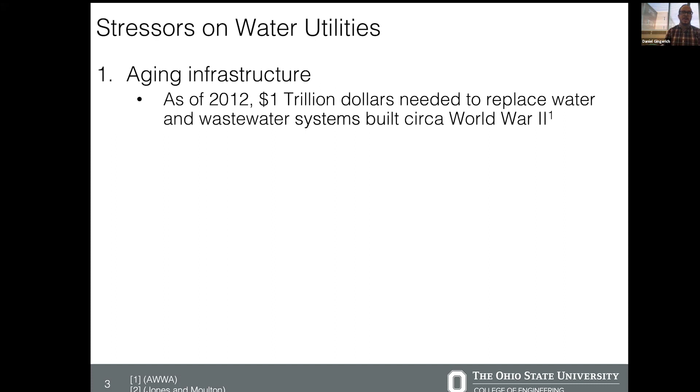In addition, water systems aren't just going to need to deal with the past and rebuild as we update and modernize our infrastructure, but also think about a far more uncertain future when it comes to the consequences of climate change. Estimates say that dealing with drought resiliency and impacts from things like flooding is going to cost water systems on the order of $36 billion by 2050, in order to meet the challenges that a changing climate is likely to impose on them.

Then there are questions around regulations and increasing activity around drinking water contamination. As of right now, there are over 90 contaminants that have primary national drinking water regulations, or primary maximum contaminant levels. There are also secondary MCLs, which I'll talk about a little later. But these are regulations that water utilities have to meet when it comes to the provision of drinking water services and drinking water systems.

This will have affordability consequences because water utilities will often need to charge their customer bases in order to pay back the capital that goes into developing the treatment systems required to meet these regulations, or to pay for the operating and maintenance costs for such treatment processes.

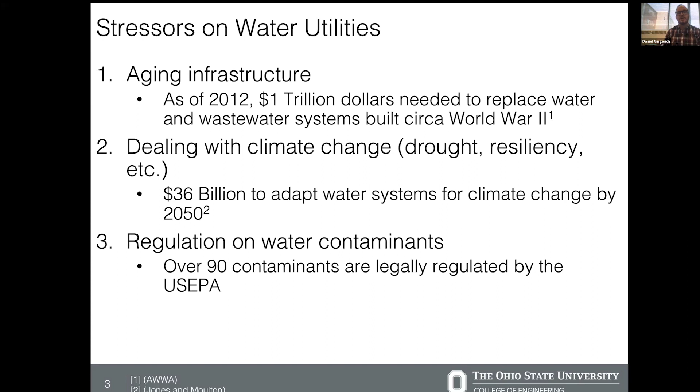Thinking about regulations and water affordability, while it dates back to the initial congressional record and debate around the 1974 Safe Drinking Water Act, it really becomes a regulatory push that utilities and the Environmental Protection Agency start to think about in 1996, with the Safe Drinking Water Act amendments signed by President Bill Clinton. This is really the start of when the EPA was formally tasked with thinking about affordability and its consequences for customers and the American population, and the consequences that regulations might have on the ability of households to afford water services.

We can think about this relationship between water affordability and regulations like this. We have several groups in this simple model. We have utilities whose job is to treat and distribute water to customers, and we have households that have money to pay for that water provision service. In essence, households give money to utilities and utilities give households water back.

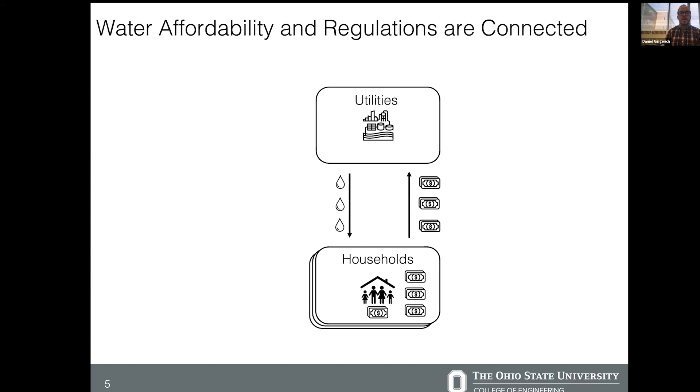But this might change, and in particular we can think about how utilities have to spend the money they make. Oftentimes, the money that utilities bring in as revenue needs to go to pay for maintenance, operating costs, and system-level improvements in order to continue providing safe, reliable water sources to their consumers.

This then gets shifted when the Environmental Protection Agency or another regulatory body comes along and promulgates a regulation. In particular, we can think about an EPA regulation that is going to increase the cost or create more need for improvements to the system, either in the form of capital costs or operating and maintenance changes. Now, the EPA is aware of this, and they're tasked by the 1996 Safe Drinking Water Act amendments to think about the ability of systems to raise money from their ratepayers.

In essence, the amount of money left over that households can afford to spend on drinking water provision is what's known as the system's financial capacity. In this model and understanding, the system capacity can then be tapped in order to pay for water improvements and to cover the increased costs that a regulation might impose on systems.

This works up to a certain point. So for instance, we have one hypothetical regulation here, but we can think about a second hypothetical regulation that is also going to impose additional costs on water utilities, and those costs are going to need to be passed along to ratepayers.

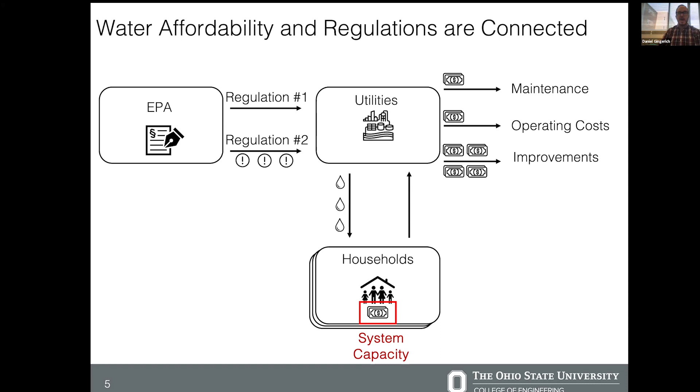However, here we run into a scenario where we can compare the remaining system capacity in the water utility and the households that pay rates to cover these costs. We can see that at a certain point there will be a fundamental mismatch, where the needs of the utility to comply with the regulation don't match up with the financial capacity of its ratepayers to afford and still maintain access to drinking water services. This is what we think about and how we define the idea of unaffordable water.

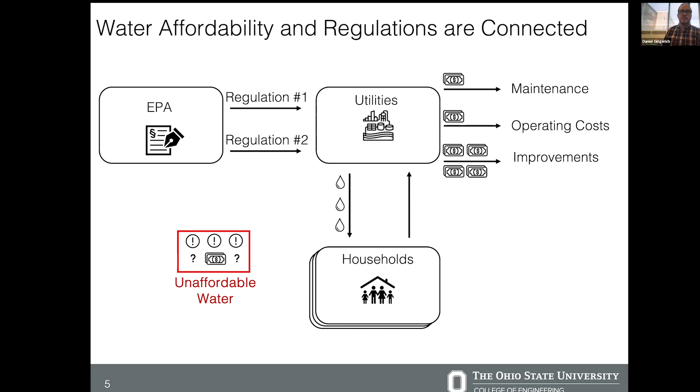To assess this work and think about this history of water affordability, I'm going to use the same general framework, or the same general model. I'll provide a high-level introduction, and I'm happy to take questions during the Q&A period. We'll also do a little work to talk about how we tailor this in each case. But in general, we want to understand what is the financial capacity of systems, and how much can they tap into without overburdening their consumers for water.

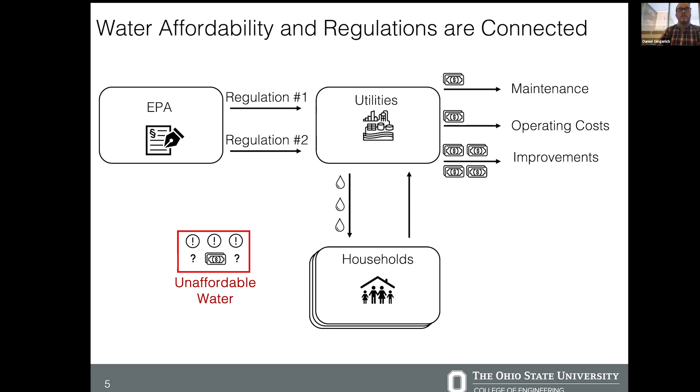To do this, we're going to collect data on four different sources. We're going to look at the demographics of systems, that is, what is the average household size, because that will impact the average water bill per household. We're looking at data on water usage per household, and we're going to look at a variety of economic factors and metrics to understand the financial health and well-being of households that are ratepayers.

In addition to that demographic data shown in the green box, we're also going to look at cost of water in the blue box. That will come from a variety of sources to understand current water rates and the household water bills consumers are paying for water services. We're going to look at the cost to comply with regulations, using data and models developed by the EPA specifically for the purpose of understanding the economic consequences of regulation.

We're going to look at a diversity of affordability thresholds or affordability metrics, in part because over the past 2.5 decades, as we've tried to nail down this nebulous concept of affordable water, there's been a bunch of different suggestions, both from the EPA as the people whose job it will be to implement such a metric, as well as the broader academic and water policy community. In this talk, I'm going to highlight 5 different affordability metrics.

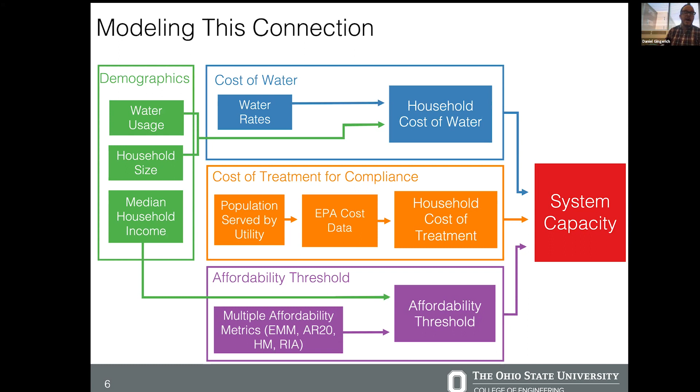The first of these is the expenditure margin method. The basic concept is that we take the household water bill after a regulation has been proposed and compare that to the community's median household income, or MHI. If that ratio is above some critical threshold, then we determine that water is unaffordable. For much of the history of the EPA's work on water affordability, this has been their standard approach.

There have been attempts to look at other methods, such as the incremental burden method. Whereas the expenditure margin method thought about the entirety of a water bill that a consumer is paying, the incremental burden focuses on the consequences of one single regulation. We'll look at this in the context of the arsenic regulation promulgated in 2001, trying to understand the incremental cost of just complying with an arsenic standard. But we're still doing the same basic principle: we look at this cost and compare it to the community's median household income, and if it's above some threshold, that's unaffordable water.

There are other metrics that have come out in recent years. Some include the hours of minimum wage—the number of hours a household or worker would need to work at a minimum wage job to afford water provision for a month. There's the affordability ratio, the ratio of the household's water bill to disposable income, where disposable income is household income minus essential costs like rent, food, electricity, other forms of energy, transportation, and healthcare costs. Once removed, this gives us a disposable income, and we can understand how much of that needs to be spent on water.

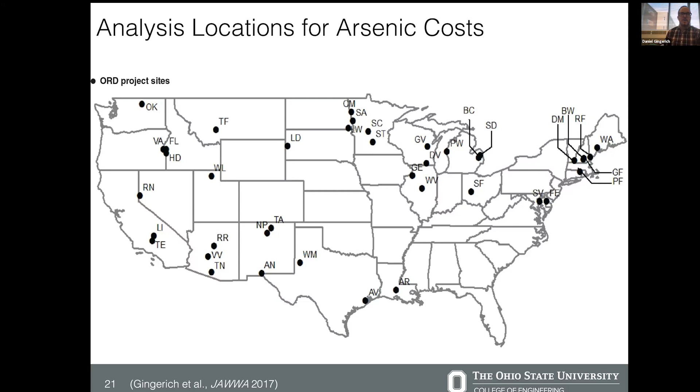What we found is that under different approaches, some locations would experience unaffordable treatment. This map here is showing those systems that would have been determined to be unaffordable, given what the economic conditions were on the ground. We can see that there's a diversity of these.

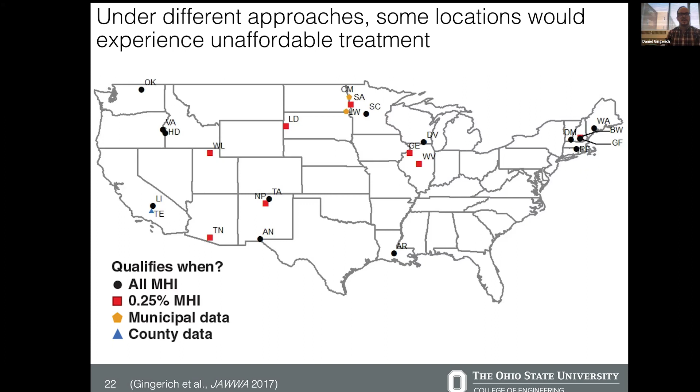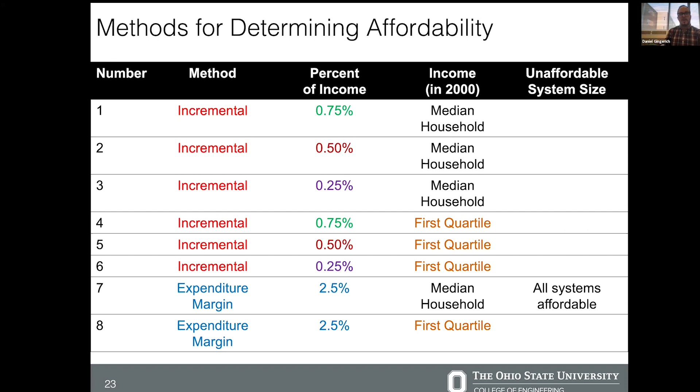We can also look not just at the site level, but think about system level data across the entire country. If we go back to this particular table showing our methods for determining affordability, I've got this new column on the right about unaffordable system size. These are systems below a certain threshold that would be determined to have unaffordable water. For the standard the EPA used, method number 7, the expenditure margin with 2.5% of the median household income, it would turn out, as the EPA found, that all systems would be affordable. But we can change that by looking at some of these other methods.

For instance, if we looked not just at the median household income, but the first quartile household income using the expenditure margin, or with the 0.75% of the median household in the incremental standard, we see that the smallest systems, those serving less than 100 people, are likely to have had water that was unaffordable under the standard.

We can then change these thresholds a bit more. For instance, looking at those lower thresholds with the median household income, or some of the first quartile income with incremental burden, we see that all very small systems, all systems serving less than 500 people, would likely have been determined to be unaffordable under the arsenic maximum contaminant level that the EPA set.

And then finally, at the most strict affordability definition, the incremental standard at 0.25% of the first quartile household income in a community, we'd see that any small system, so any system serving less than 3,300 people, would be unaffordable. So there are some lessons and implications that come out of this for how we think about policy and water affordability, especially with this idea of an incremental method and not just the expenditure margin method that the EPA had adopted.

In essence, the key takeaway is that under an incremental burden approach, which was the method the EPA was considering as a result of the arsenic MCL process, it would have been more likely that standard would have triggered a determination of unaffordability. But there are some fundamental challenges with an incremental method that we haven't really acknowledged or addressed. The first is that an incremental burden approach fails to account for what might be considered a stacking up problem.

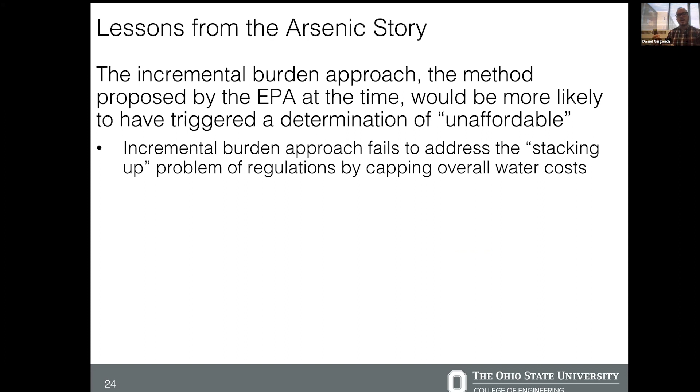That is, if regulation 1 imposes a cost of 0.5%, regulation 2 is another 0.5%, then 3, 4, 5, all at 0.5% each, I'm suddenly at 2.5% of my median household income for a total cost or total percent of income. If that's allowed to continue, it will eventually cause problems no matter what threshold you set as a total water burden, because there's no overall cap under an incremental burden approach.

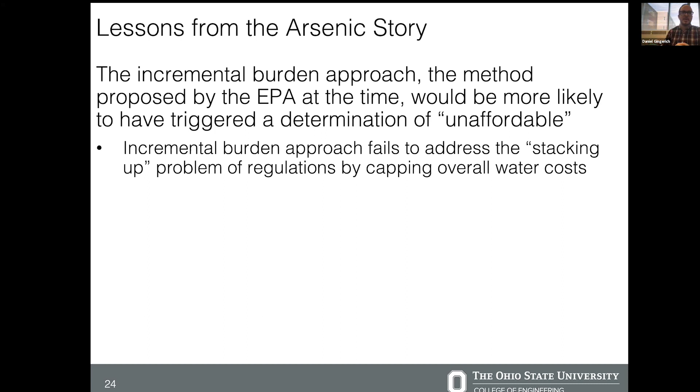It's also the case that any use of the median household income fails to focus on the needs of low-income households, which is critical for understanding household affordability. So really what we need to think about is not just median household incomes and system capacity, but more broadly about our entire community of ratepayers, not just those at the median household.

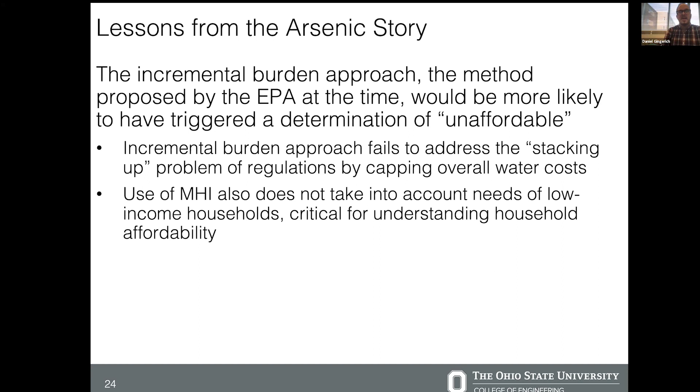Which brings me from this first story, the story from the early 2000s and the following decade and a half of work on arsenic, to think about what's really taken over the discussion in water affordability since then, which is understanding low-income households and their ability to afford water services.

This came to a head during the COVID-19 pandemic, in part because water utilities across the nation imposed moratoria on water shutoffs. That is, we don't care if you can't pay your water bills right now, we're going to keep giving you access to drinking water, in part because we recognize that drinking water is an important part of what it means to be healthy, and it is important in maintaining your health and safety during a pandemic, where one piece of guidance is doing things like washing your hands.

While that sounds trivial, there's scientific evidence that found there's likely to be a correlation between states and municipalities that had moratoria on water shutoffs during the pandemic and saving lives. In particular, there are estimates that upwards of about 9,000 lives were saved in the initial outbreak of COVID-19, which could be explained by the presence of moratoria on water shutoffs in those locations. So we see that there is, in fact, this connection.

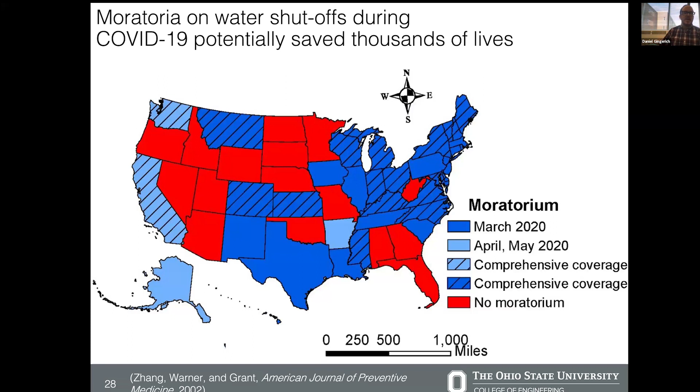But as the COVID-19 crisis, as the initial peak passed, we see communities that then moved to resume water shutoffs and water disconnections. In particular, we have one in Columbus. The moratoria ended on August 23rd of 2021, roughly a year and a half after it was implemented. Households were expected to pay for water services again, and if they did not, there would be disconnections, consequences, and loss of ability for water use.

So one of the questions we've been thinking about is, well, what is the current state of water affordability? To answer this question, we partnered with the Ohio Environmental Protection Agency to conduct a survey on water, sewer, and storm sewer rates throughout the entire state of Ohio. We're going to talk about our work thinking about water, but that report is available on the Ohio EPA's website, or I can send it to you if you're curious, to understand what water rates are throughout the state.

With water rates, before any regulations, we can now think about these various affordability metrics that I laid out, beginning around how we define and think about water affordability. Again, that can be just the percent of household income spent on water bills. We can think about the amount left over after essential purchases, and the number of hours of minimum wage work you might have to work in order to afford your monthly water bill.

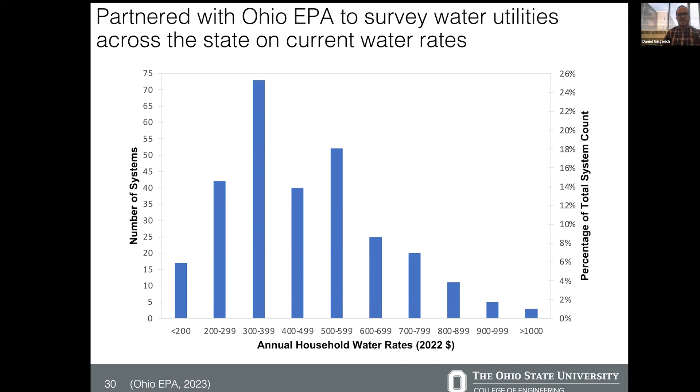That's not the case, though, if we think about some of these other metrics that are more geared towards low-income households and low-income populations, like our affordability ratio and the water cost, or the hours of minimum wage that need to be worked in order to afford water.

In these cases, we see that about 40 to 50% of communities or water systems in our survey have water bills that might not be affordable for their low-income consumers. So when we look at these low-income numbers, we see a story around how even if systems might be able to afford water provision and the median household might be able to pay their water bill, that's not the case for low-income households.

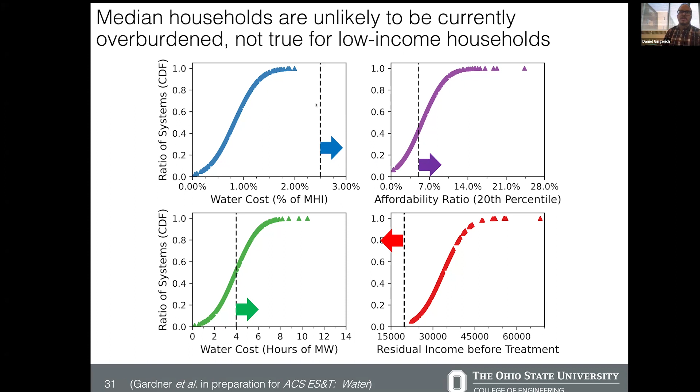However, if we break these data down by system size rather than presenting them all grouped together, we see that for many of these metrics, there are still consistent percentages of households affected, from very small up to large systems. For some metrics focused on disposable income for low-income households, even very large systems have significant populations unable to afford water services. This is consistent across system sizes, so system size might not necessarily be the protection we need to keep water bills affordable for all ratepayers.

But that's where affordability stands now: low-income households are likely to be stressed and experience water unaffordability, even as median households from most systems are likely to be fine.

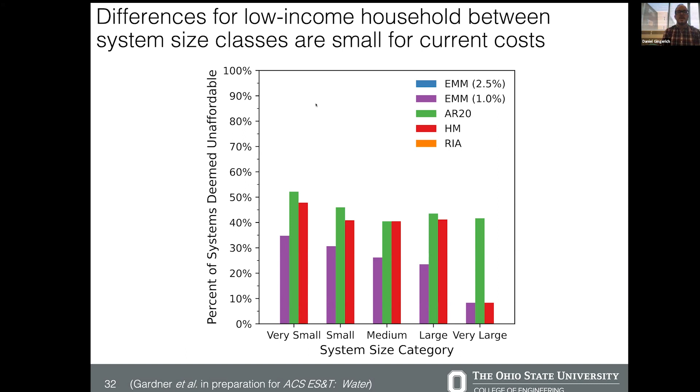Over the past few years, we've seen a flurry of scientific and regulatory activity to understand PFAS compounds. Under the regulations, there are several requirements that need to be met for the EPA to promulgate a regulation on drinking water. First, the contaminant needs to be widespread throughout the nation.

If it's not found in multiple states or regions, the EPA is likely to, instead of taking action itself, recommend that state-level departments of environmental protection, environmental quality, or health take action on their own, rather than getting the federal government involved in what is a regional problem.

If it is widespread, there has to be human health consequences as a result of that contaminant being present in order to justify regulation and justify the costs. These ones that have human health consequences are known as primary standards.

There are also, in the drinking water community, secondary standards. Those focus primarily on contaminants that have aesthetic consequences for water, like discoloration or taste and odor compounds. They can have cosmetic impacts for people who drink them. For instance, there's a standard on silver that has never been a threshold of concern in the United States, but it exists because there's evidence that high levels of silver in water might lead to skin discoloration for humans who consume it. It's purely a cosmetic change with no deleterious health consequences besides that.

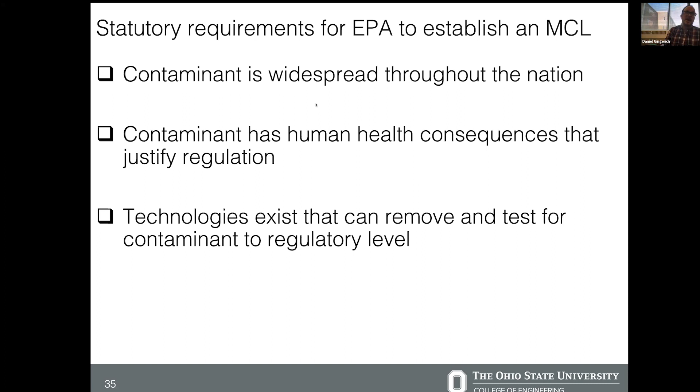Once a human health consequence has been demonstrated, there also needs to be evidence that there are technologies suitable for this regulation—that there are technologies to treat that contaminant down to a regulatory level of interest, but also that there's the capacity to monitor and analyze water samples to ensure we're able to meet our regulatory level.

And once we know there are these technologies, we need to ensure that they can be operated in a cost-effective manner and that they do not pose an undue and unjustified financial burden on communities. That 'unjustified' implies a benefit-cost analysis standard has been the rule for most environmental regulations promulgated by the federal government since the Reagan administration in the early 1980s, with an executive order that he first promulgated.

So for PFAS, we are seeing evidence that these boxes are being checked. There's been work by scientists throughout the nation, and in particular recent work by scientists at the United States Geological Survey found that PFAS contamination is present in 45% of drinking water supplies throughout the entire country. So nearly half of all drinking water utilities likely have some PFAS contamination—it is a widespread concern.

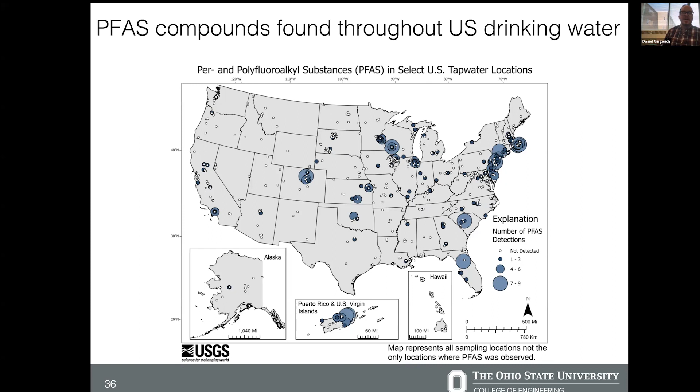We also know, and there's a growing body of evidence highlighting human health consequences for PFAS contamination throughout the entire human life cycle—everything from birth weights all the way to increased risk of death and cardiovascular disease. So there's a pretty solid body of scientific evidence linking PFAS contamination to human health consequences. That ticks the second box.

There's also a growing effort to think about the technologies that exist to remove PFAS compounds from drinking water. In particular, when we think about PFAS, there are what's known as the big three. These are reverse osmosis membranes, which essentially filter out PFAS compounds—they can't pass through the membrane.

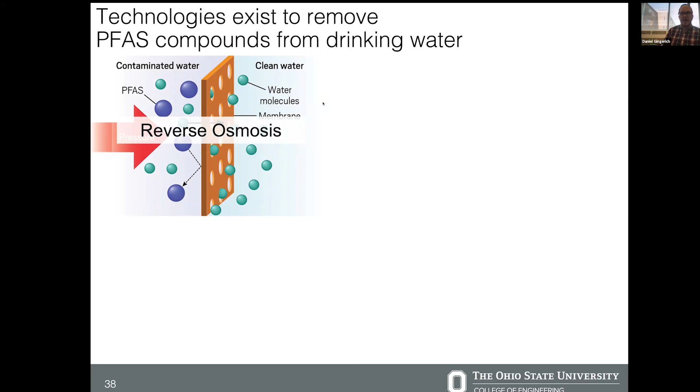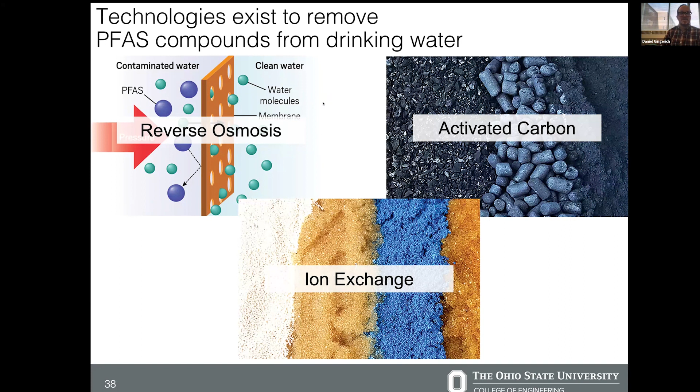Then there are sorptive materials like activated carbon and ion exchange, both of which allow the PFAS compounds to sorb, or stick, to the surface of these resins or activated carbons, with treated water coming out the other end. So we have technologies that exist, and we're continuing to develop technologies that can detect PFAS compounds at even smaller levels, getting to the levels of interest for drinking water for PFAS.

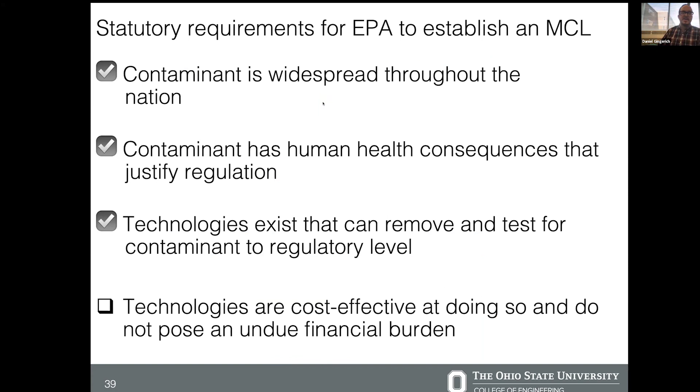So we've checked three of these boxes, and as part of their effort to understand this last one and promulgate a regulation, the EPA has announced a preliminary PFAS standard—an intent to regulate, and some initial thoughts about what that standard will be. That was promulgated a little under a year ago, in March of 2023.

We're going to need to start thinking about how water systems will comply with PFAS regulation, especially given that those big three technologies can be very expensive systems to install and operate, especially things like reverse osmosis, and there are associated costs—not just with the treatment itself, but thinking about residual disposal and what we do with PFAS once we've got it in a more concentrated form.

So what we did here was think about what technologies we can consider. We included, at least for smaller systems, not just the big three, but other options that EPA has models for, though they aren't fully considered: non-treatment options, essentially building or drilling a new well for a system, or doing an interconnection and connecting with a bigger nearby system.

We use these EPA models to understand, for systems of a particular size, what the lowest cost technology is that they're likely to adopt. Because once we know what technology systems are likely to adopt, we can add that cost of compliance onto the previous estimates of drinking water affordability I showed you.

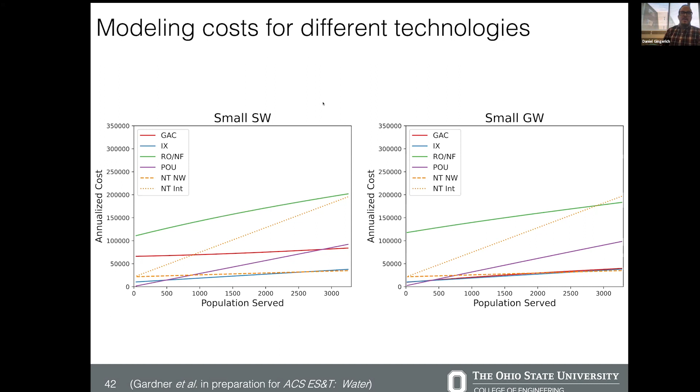That means the standards for low-income communities and how we think about low-income households' ability to afford water will be exacerbated. And that is indeed what we find. I'll show you the percent change, but we're looking at anywhere between 5 and 20% of systems now, as a result of PFAS, more likely to have unaffordable water for their low-income communities. So compliance with this standard is likely to be a challenge.

There is money available to help utilities install treatment technologies, a bunch of this as part of the bipartisan infrastructure law. However, there's a lot of concern, not just around building the new technology, but also how it will be operated and how it will cover day-to-day operating costs for water utilities, because there's a lot less money to subsidize daily operations of water infrastructure systems. That's really where the costs and concerns come into play for water affordability with PFAS compliance.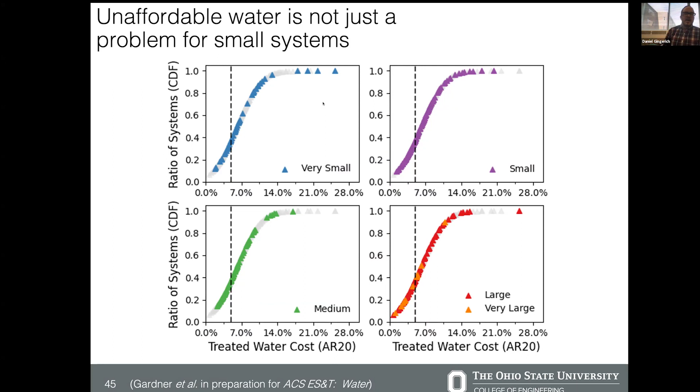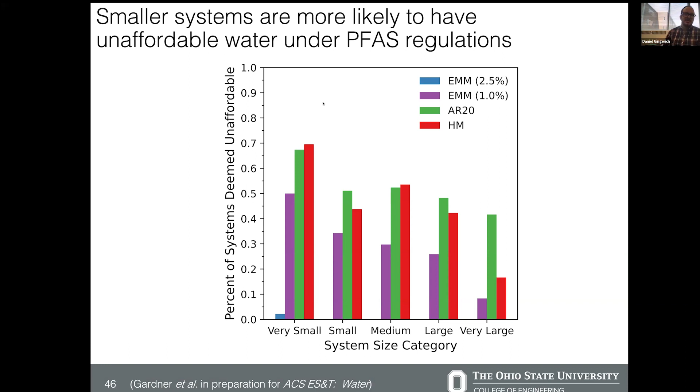We can also compare the percent of systems likely to be unaffordable for low-income households. This graph shows the difference between the percent of systems deemed unaffordable under different metrics and size classes, comparing a PFAS regulation scenario to the existing baseline before a PFAS regulation is imposed.

For instance, 21.74% of very small systems did not have unaffordable water per the hours-of-minimum-wage standard before PFAS, whereas after PFAS we're seeing an additional 21.74% of systems. So 1 in 5 of the very smallest systems are now likely to have water that is unaffordable given the hours-of-minimum-wage standard.

So we can see that the very smallest systems are likely to have substantial impacts, although there's an interesting peak around medium systems as well, where we're seeing upwards of 10 to 15% of water systems likely to have unaffordable water.

So, to quickly wrap up, what we see is evidence that many utilities, by looking at that median household income metric, as well as the residual income approach metric, may indeed have financial capacity to afford water systems.

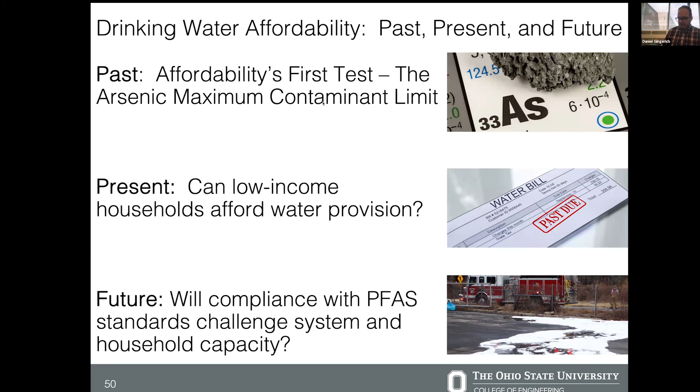One of the things we're really thinking about is rate structures. In particular, how do we design rate structures so that there's some level of cross-subsidization for low water use households? I'm going to try not to get too into the weeds here around water rate structures, but I want to do a little bit.

There are several different ways water utilities can set their rates. One is known as a uniform block without a fixed component - every 1,000 gallons or every 100 cubic feet of water costs a household the same amount. You might pay, for instance, 20 or 15 bucks for a kilogallon of water, no matter how many kilogallons you end up purchasing. In this case, the average price of water looks the same because you're paying the same per gallon.

This is different when we compare to other forms of structures, such as an increasing block structure, where the more water you use, those higher uses of water - those last few gallons - will cost more than the first few gallons. What this allows us to do is shift the average for high water use households up so that they're paying more, whereas low water use households are paying less than the system average.

We can think about how we design these policies to cross-subsidize, such that the higher water use bill that these households pay can be used to subsidize lower water use household bills, and we can do so in a way that is revenue neutral. It's also important to understand that this kind of rate design structure follows economic logic in general.

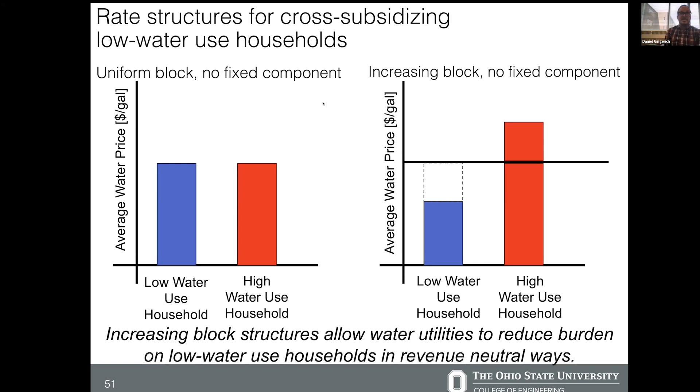However, this is not necessarily what we find when we ask systems how they structure their rates. This is some data, again, from that Ohio water and sewer rate survey, where we just asked utilities: how do you structure your rates?

What we see is that smaller systems are more likely to report having uniform or single block structures - everyone paying roughly the same amount per gallon - as opposed to large and very large systems, which are more likely to have variable block rates, such as an increasing block rate structure, or a decreasing block rate structure where those last few gallons cost less per gallon than those initial gallons.

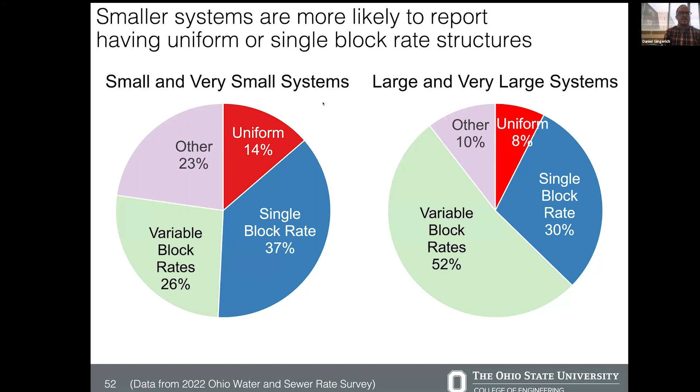What we also see is that when systems report having a variable block rate, especially large and very large systems, they're more likely to report having decreasing blocks - which means that rather than seeing the cross-subsidization of higher water use households paying more per gallon to subsidize lower water use household water use, we see the exact opposite.

We see that lower water use households may be more likely to pay more per gallon than high water use households, which is interesting. In part, it is not the way that economic logic would teach us to think about water resource allocation questions, but it also raises really interesting and challenging equity concerns.

We think about how we design water rate structures that will be equitable, that will ensure that individuals have access to water services at costs that are not an undue burden to households, that will not force them into uncomfortable trade-offs between other essential services like electricity, food, transportation, clothing, medical care, because that's really what we want to avoid.

The goal of water service and the goal of water provision is to protect public health. At the end of the day, that's what drives this work. We know that if people have access to clean water, they're more likely to be healthy, and there's a public benefit in that.

But what we can see if we're not careful in how we think about these rate structures, is that rather than water being a public benefit, it could impose public costs because people are not able to afford their essential services. And that might have consequences for those individuals that we as a society will then be asked to bear as part of our healthcare policies.

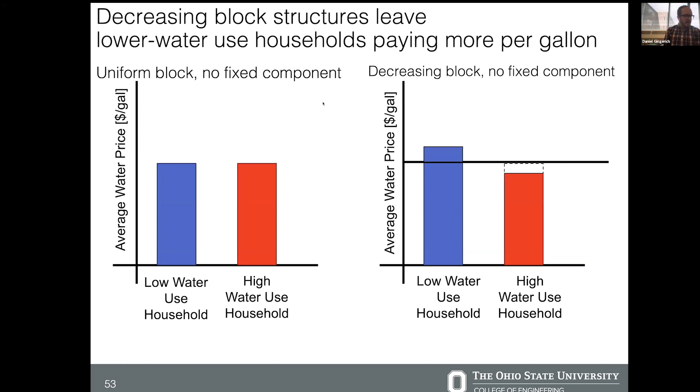But with that, I will now open the floor up to questions.